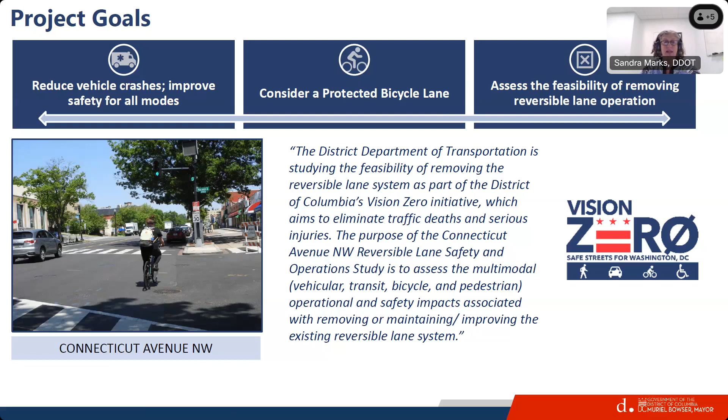If we go to the next slide, we can share a comparison of crashes prior to the reversible lanes, while the reversible lanes were in place, after we removed them, and then a follow-up column for 2023 data to understand how that impacted and reduced our crashes. So we know that the crashes have gone down, which is a great result, and we know that we have more work to do.

The reversible lanes actually had a disproportionate percentage of crashes occurring during the peak hours when the reversible lanes were in effect. After we removed them, it was reduced from 46% of the crashes down to 26%.

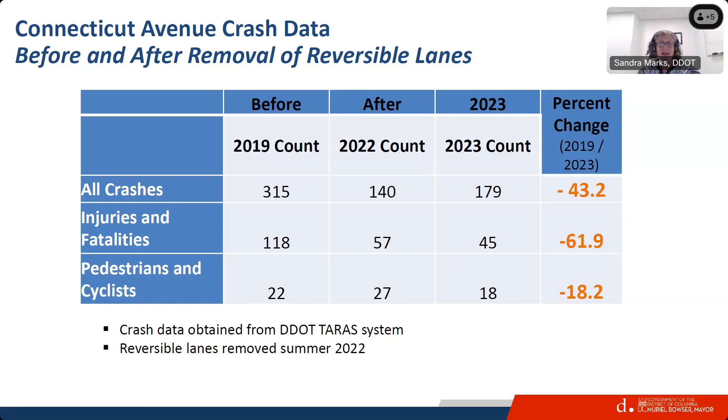On the next slide, you can see prior to the reversible lanes, when they were in place, this just shows where the crashes were occurring. The larger the blobs or dots, the more crashes were happening in a particular location. On the bottom, you can see that while there are notably fewer crashes, they still remain up and down the corridor, and that's something we want to really talk about tonight. For orientation, the left is north and the right side of the screen is south.

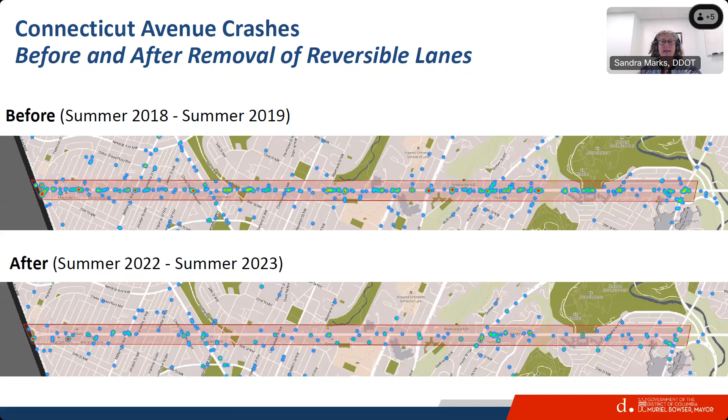I want to highlight the different types of crashes that we're seeing. Not all crashes are the same. When we took a look at the crash data on the corridor, we noticed that the majority of crashes fell into three major categories: left turn crashes, side swipes, and rear ends.

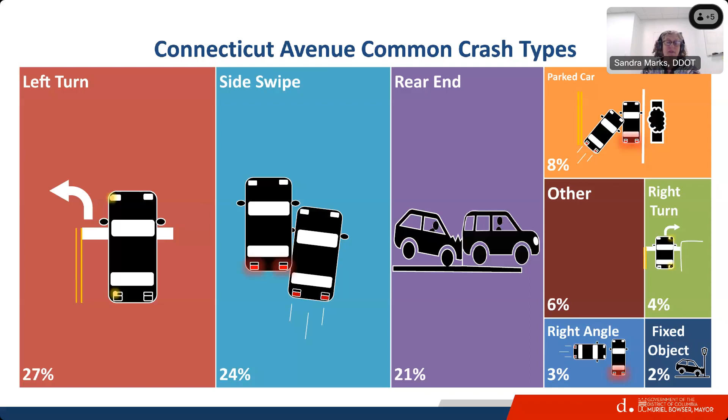It's important to note this, because when we look at different treatments and what types of crashes we're trying to solve, we want to understand what the issues are so that we pick the right safety interventions to improve and make things safer. So in order to address the 27% of left turn crashes, we looked at the intersections where we had the highest number of left turn movements. On the next slide, you'll see there were 16 locations where we identified

a left turn lane with a protected phase. So what that means, as you see in the picture on the top right, is a lane to pull the left turning vehicles out of the through traffic. They will have their own phase, and those of us who have driven throughout the city understand that you wait until you have your own phase so you're not conflicting with the pedestrians going straight. This does a number of different things.

Dedicated left turn lanes can reduce crashes up to 48% by moving those out of the through traffic. It also provides an opportunity for that protected left turn signal phase, which improves pedestrian safety. And when you have the left turn lanes offset, you also improve sight lines, which helps reduce some of the crash potential there.

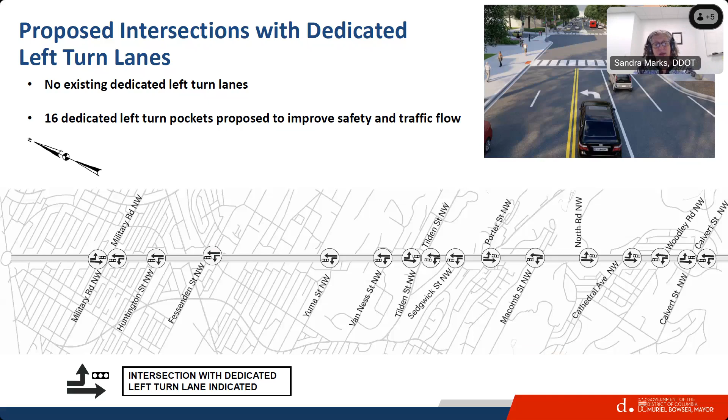One of the other things that those of you who live on the corridor or travel on Connecticut Avenue may know is that over the past 6+ months, we added some new automated traffic enforcement cameras. On the next slide, you'll see where those locations are. We have some historical or older red light cameras, but there are 3 new speed cameras along the corridor. Those have been installed, installed last fall.

We will continue to monitor the tickets that are issued from those locations. One of the things we look for is a reduction in the number of tickets when we put in a safety improvement. We want to see that number going down to ensure it's having the desired effect and we're slowing people down along the corridor. But as of today, or in April, the last time we checked, there's still a significant number of tickets being issued, which tells us that there are still some issues out there that we need to address with this project.

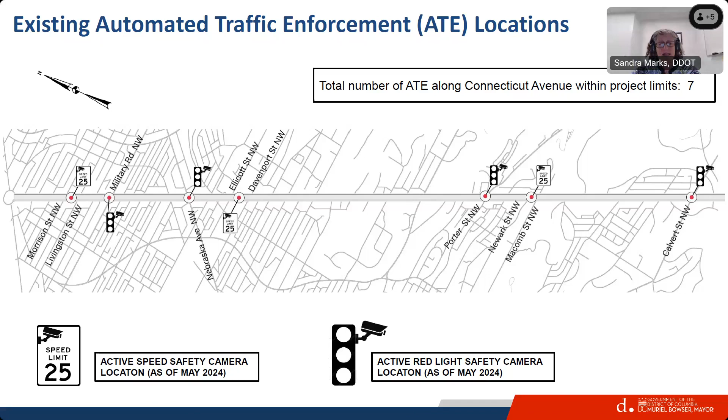In addition, there are a number of uncontrolled pedestrian crossings on the corridor, primarily on the northern section. Again, the left is north. We are looking at identifying safety enhancements to either signalize or upgrade those, because we know that crossing 6 and ultimately 4 lanes of traffic at an uncontrolled location such as Connecticut is not the safest condition. So that will also be an element of this project, and that's consistent with what we had in the previous concept C as well.

I just wanted to highlight a couple of things. Most of what I've outlined, the left turn signals, the uncontrolled pedestrian crossing treatment, and some things not in the slides, like the slip lanes, which are uncontrolled right turns we have at Nebraska and other intersections. Those elements and upgrading those safety features are also part of this concept, so they remain as they were in the previous concept and where we are now.

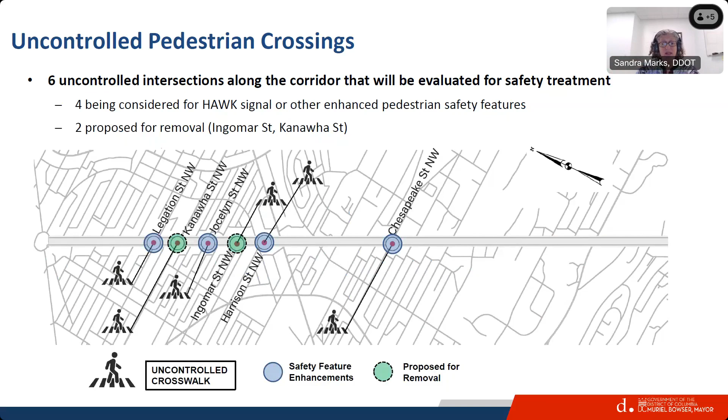As the director shared earlier, the concept stage is where we lay out the vision and refine it, then go into engineering and design, and understand more about what that cross section will look like. So as a reminder for those not directly on the corridor, today Connecticut Avenue is a 60-foot curb to curb cross section with six 10-foot lanes.

In the peak hour, there's no parking allowed on the corridor, which means there are three travel lanes northbound and three travel lanes southbound. These are 10-foot lanes. We have buses that travel along this corridor, and the minimum we require is 11 feet, since those are wider vehicles — that gives a little bit more buffer.

You also saw side swipe crashes — that was one of the big crash types happening, because of the compacted cross section. Another challenge is when there are left turns: anybody behind that left turning vehicle, since we don't have dedicated left turn pockets, has to wait and get backed up behind those vehicles. And again, we have six lanes of crossing, which is not ideal for pedestrians.

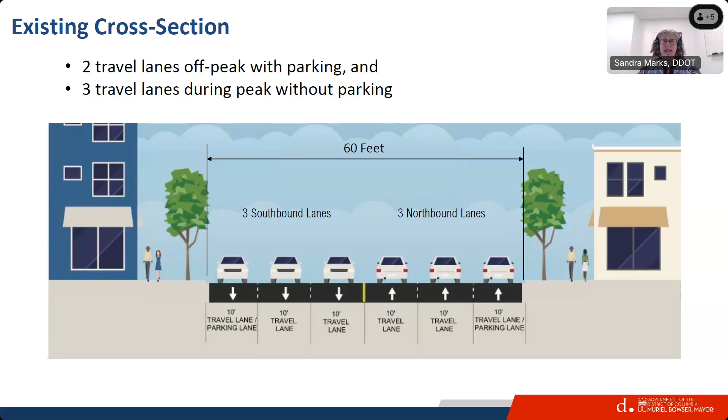So the project goals, regardless of the bike lanes, were to address as many of these issues as we can. If we go to the next section, I'll show you the cross section we're proposing for a section that does not have that left turn pocket. Looking across, we have a narrower outside lane for parking in order to accommodate that 11-foot travel lane for transit vehicles, and then two 10-foot lanes on the inside.

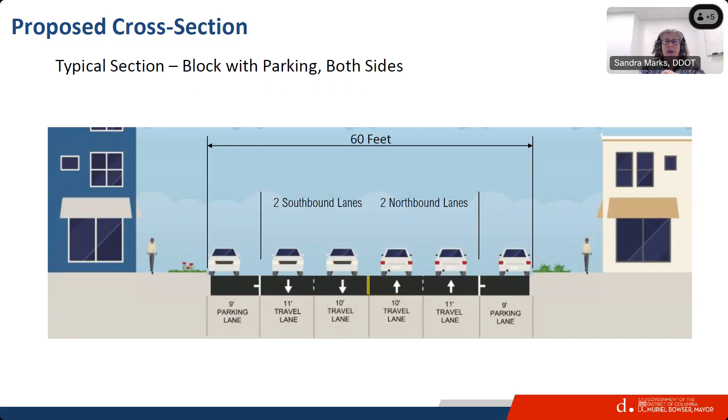And here's what that looks like in plan view, to give you an idea of how it would lay out. On the left, you can see as you're approaching the intersection what that looks like, where we're able to include curb extensions, which do a few things. One, it daylights the intersection so pedestrians are visible as they're waiting to cross. It also allows a shorter four-lane section to cross. And in areas with bus stops, it allows us to put shelter infrastructure there and let buses use that curb extension for bus operations.

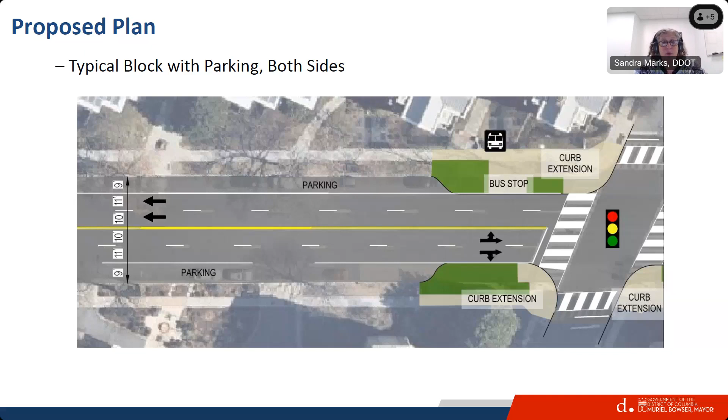On the next slide, we'll show what it looks like where we have the left turn lane. Again, we keep that 60-foot dimension at the top. We narrow in the curb, and then you have an 11-foot travel lane in the outside lane, which accommodates the transit vehicle, and then three 10-foot lanes, one of which becomes the left turn lane.

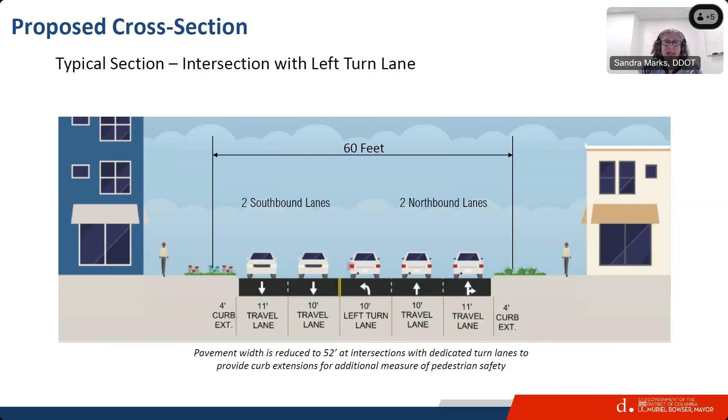Again in plan view, you'll see on the right is where we have that left turn lane, and the taper, or how long the storage is, varies depending on the amount of left turning vehicles. On the left, where we don't have a left turn on the opposing side, we take that dimension and use it for a pedestrian refuge so folks can cross in two sections if needed, and it also breaks up that right of way. Again in this scenario, we have curb extensions that can also accommodate bus stops.

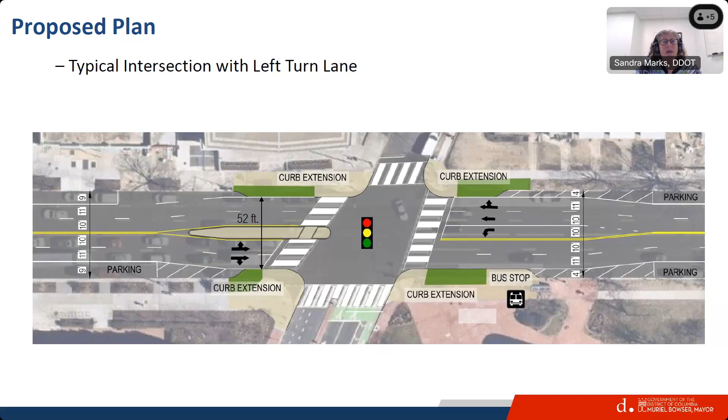The next slide shows you what that might look like with a left turn lane. On the closer section, you've got that left turn lane and it's a protected signal so that they're not making a left turn when the pedestrians have the light to go straight across. It's a little hard to see, but we'll post these on the website afterwards.

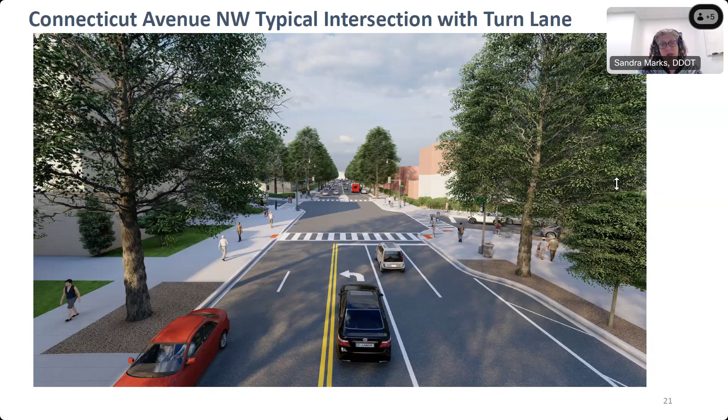I want to acknowledge there's been a lot of discussion about the bicycle facilities and how we will accommodate that. As Sharon mentioned, we are going to be embarking on a 5-year strategic bikeway plan. We know there are fewer facilities in Ward 3 than elsewhere, and we want to use this as an opportunity to build out the network. We have spent a lot of time trying to learn from the facilities we've put out to date. We want to identify the best and safest configuration, both for Connecticut Avenue and for bicyclists who want to travel through the ward and through the district.

On the next slide, the 5-year strategic bike plan is going to be focused on looking at data to identify where the gaps are, where the desired origins and destinations are, and what the missing connections are, to inform our 5-year work plan and reflect the greatest need to build out the network. This plan will also feed into an update to our moveDC plan, looking at all of our modal priorities—bike, bus, freight, high injury network—and making sure we have an actionable work plan.

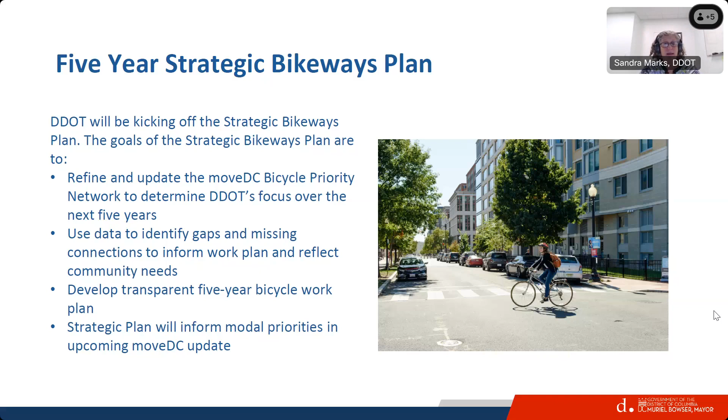On the next slide, I'll give you an overview of the timeline and next steps. Earlier this afternoon we met with the Community Advisory Committee, and we will continue to work with them to map out additional community engagement. We want to make sure we're sharing this information and re-engaging. We acknowledge there's been a lull in some of our public-facing activity, and we want to re-engage with the community.

We're going to be updating the website so this new information is up there. You'll be able to see a recording of this presentation, the deck, and some additional information. We're also going to be refining a timeline and a path forward. The next phase, as with most of our capital projects, is hoping to finalize the concept, then move into a design phase, and then into construction.

As the director mentioned, the proposed budget has funding for construction dollars in FY26 and 27, and we hope to meet that timeline. In terms of the 5-year strategic bikeways plan, we are working to update that website and finalize our scope and onboard a consultant so we can launch in the coming months and come back out to the community. There will be significant public engagement starting sometime in the fall.